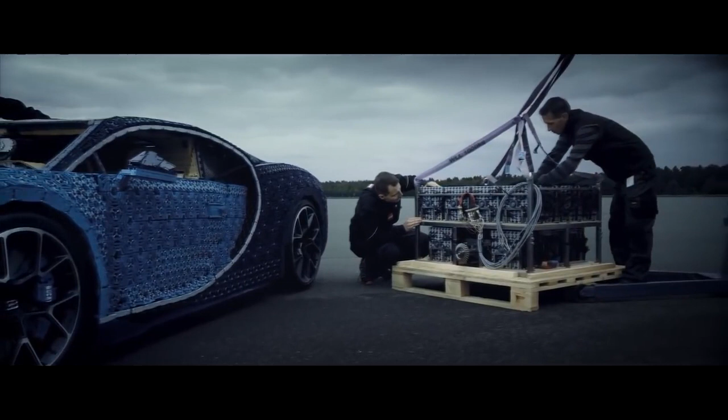Trying to match the elegant curves of the Bugatti Chiron using only LEGO Technic elements was the first challenge. Creating the engine was the second. As if constructing the car in LEGO Technic wasn't enough, we also decided we'd like to power it with small LEGO Technic power function motors as well. It sounded plausible on paper, but was it even possible? Would our car actually drive?

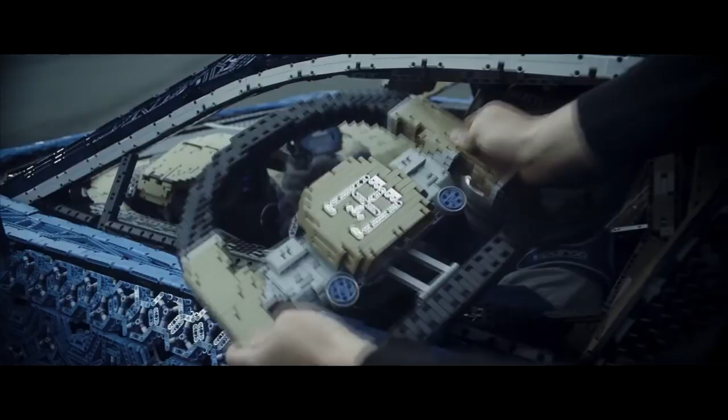Who better to find out than the guy who test drove the real Bugatti Chiron during its development? We did our last-minute checks, held our breaths, and sent him on his way.

Our amazing LEGO Technic car just kept on going. LEGO Technic. Build for real.

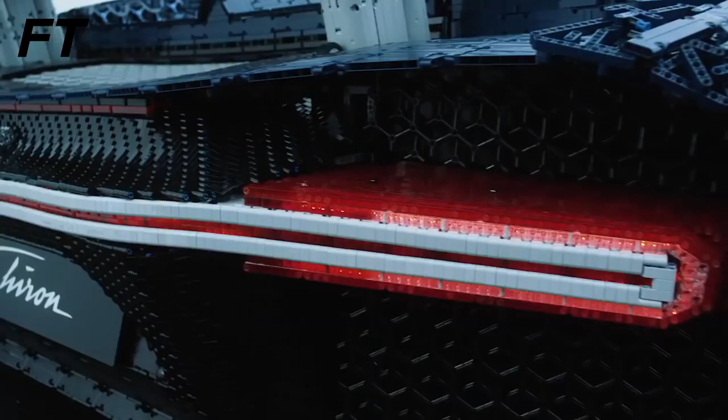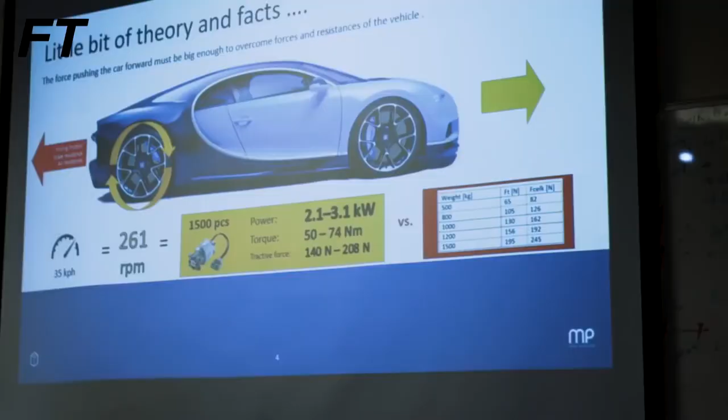In the LEGO Technic team, we came up with a really crazy idea. Could we build a full-scale Bugatti Chiron out of LEGO Technic elements and actually make it drive? This is the story of how we did it. It's one thing to get an idea. It's something else to actually make it happen.

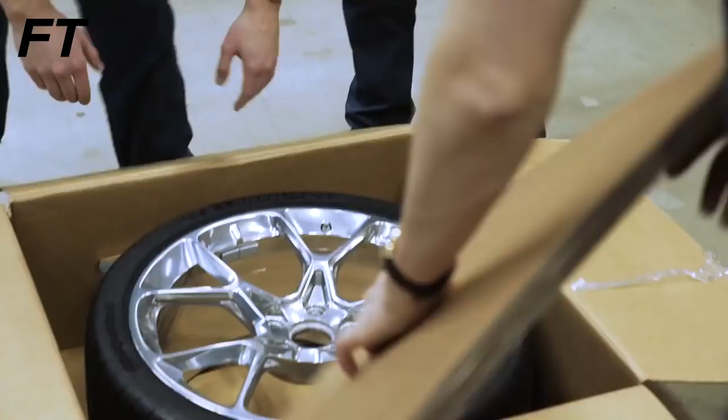But our goal was to prove that with LEGO Technic, you can really build for real. So, our first rule was that at least 90% of our car had to be built from LEGO Technic elements.

So the first time I heard about the model, I was really excited because it's something we haven't ever done before. We also had a lot of concerns because we don't do much Technic building here. So we just didn't know if that's actually possible. It's something that moves the boundaries and completely redefines the standard.

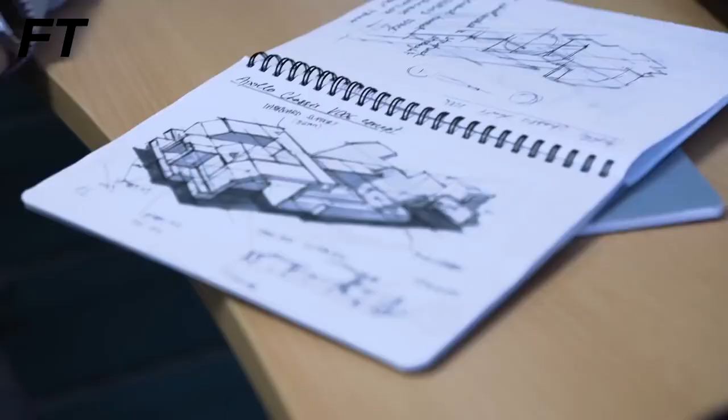Before we could even start the construction process, the team had to do a lot of research and sketching. We quickly realized that only a few technical parts could be drawn on computers. Most of the car had to be designed while we were building it.

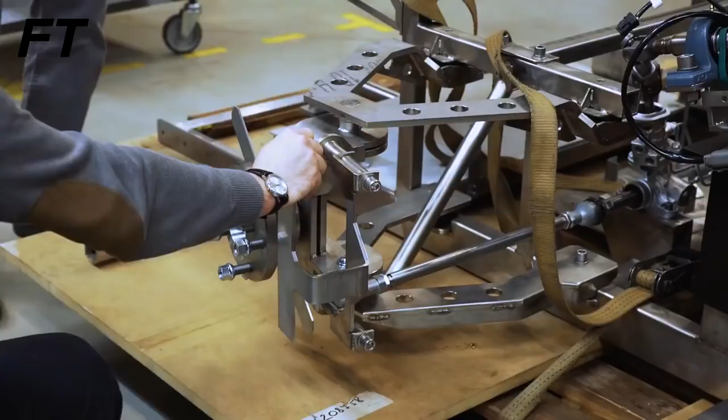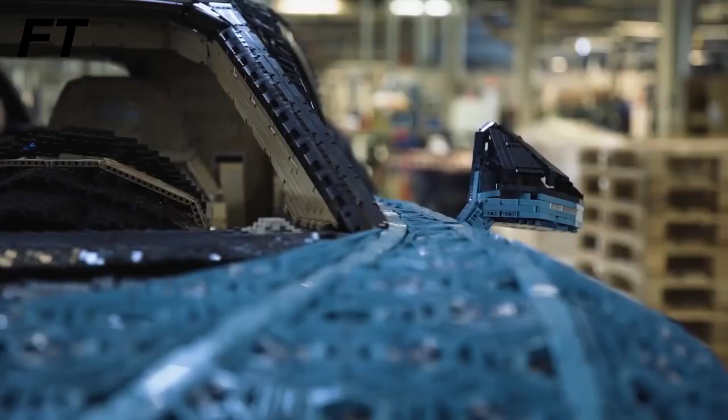We tried to minimize the construction as much as possible, so not to go with the classical chassis as all the cars have. We tried to minimize everything and to be closer to build for real. And that's the reason why, for example, now we have the A-pillar, the rear wing, or door hinges made of LEGO Technic bricks. And it was a huge task for the team to build almost everything out of Technic elements.

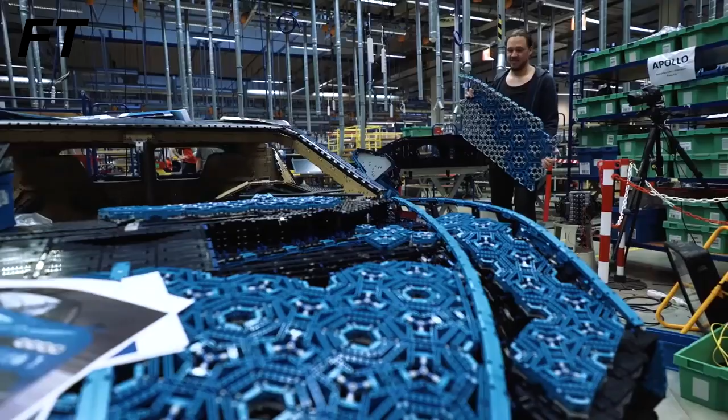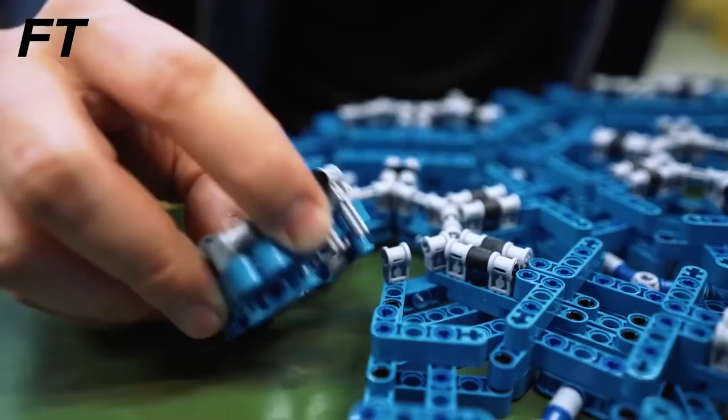The real Chiron has very sculptural aesthetics with a lot of curved surfaces. Basically, there is no straight line on the car. So we had to come up with a way to replicate the surface of the car with LEGO Technic. And for that, we came up with this so-called skin.

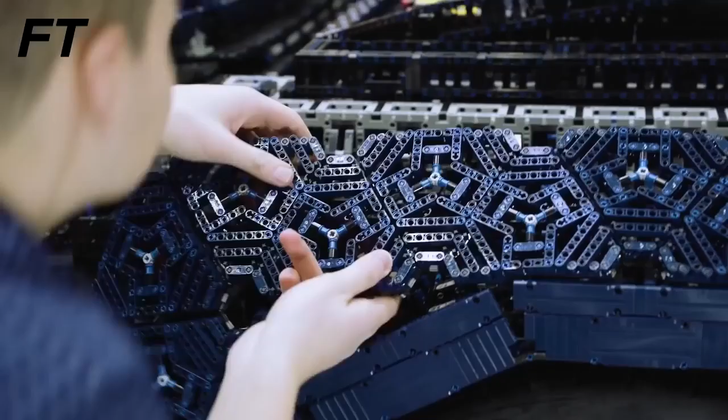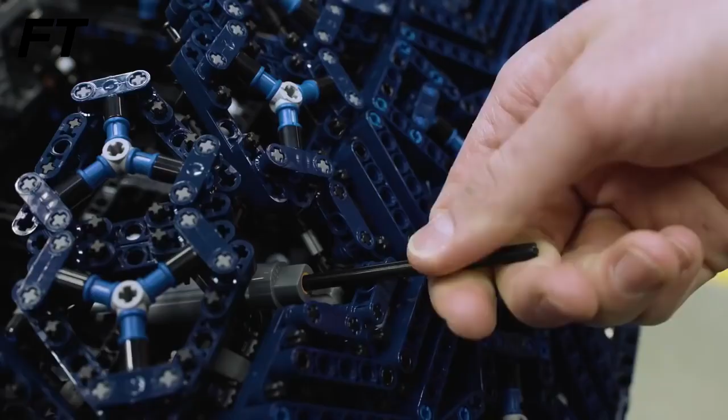Basically, the idea is we divide the surface of the car into very small triangles and then connect them with flexible elements. So we can actually have this impression of a curved surface. We not only had to build the car, but a special tool for adjusting the outer skin as well.

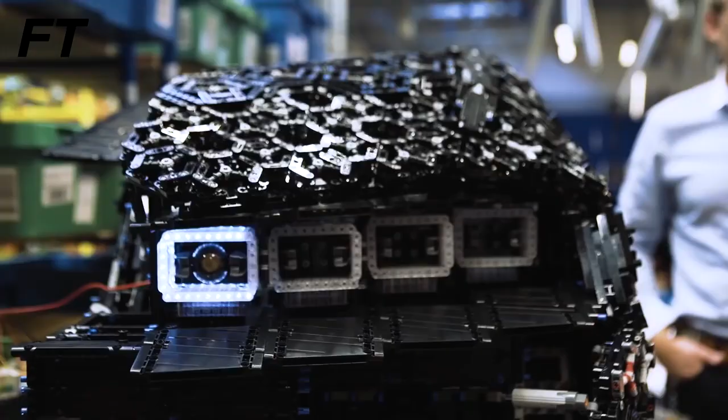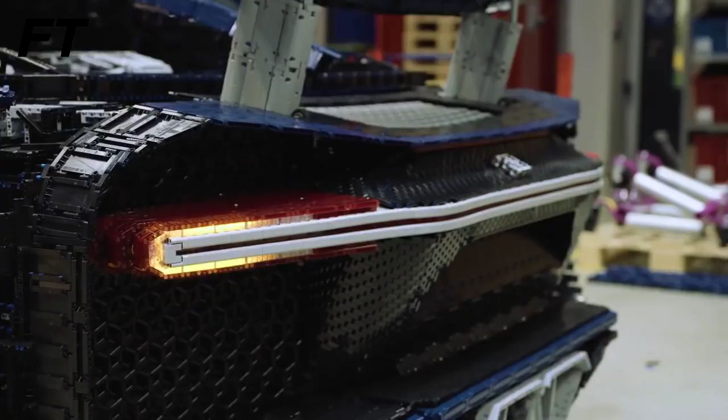One of the key design elements of the original Bugatti Chiron is the unique light system. The iconic wide rear light bar is an integral part of the Chiron's DNA. So it was very important for us to reproduce the entire light system in the LEGO Technic version and make it work just like the original car.

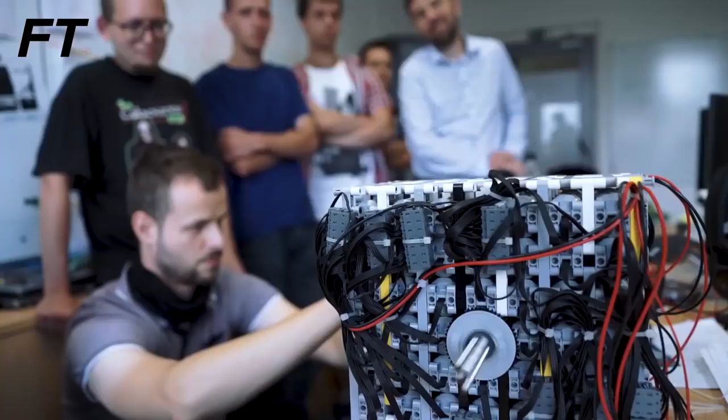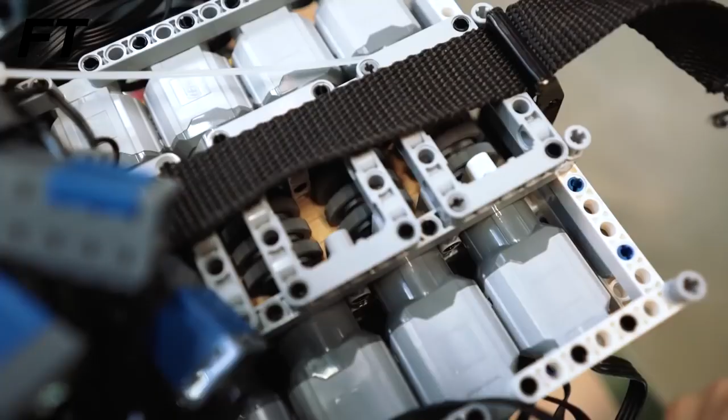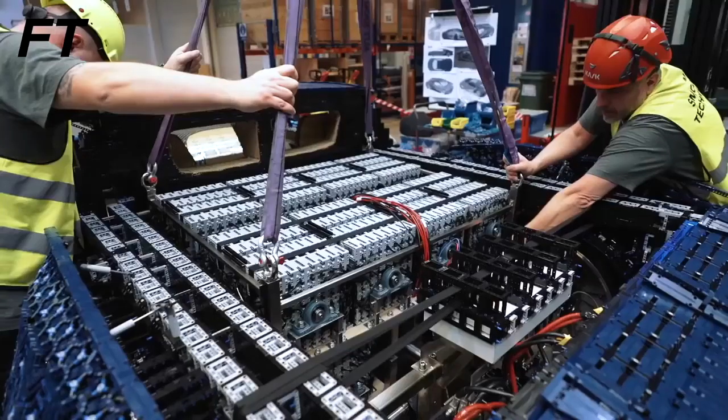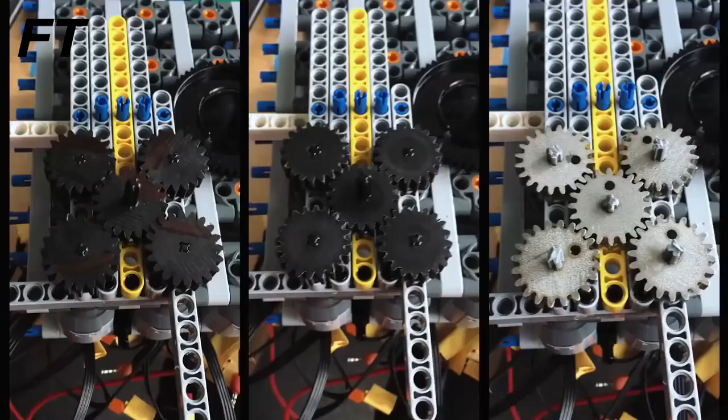The small LEGO Technic gear wheels were a major concern. They had to move a car with a weight of 1.5 tons. We started by testing other materials like metal, Kevlar and carbon fiber. Well, it was kind of interesting for me that the LEGO Technic gears were better than the Kevlar ones or the carbon fiber 3D printed gears.

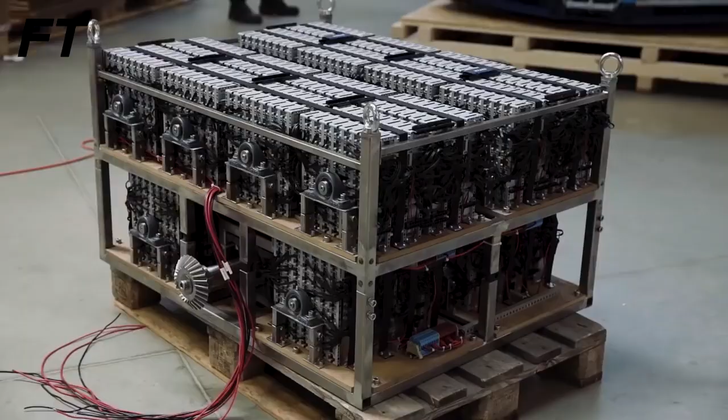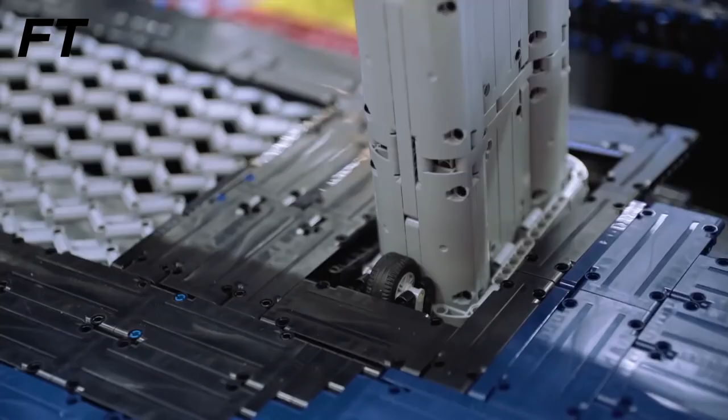A major technical challenge on this LEGO Technic version of the Bugatti Chiron was the large rear wing, especially when we decided to make it fully functional and powered by LEGO Technic Power Functions and pneumatic systems. This was a true build-for-real project, and all details had to be perfect.

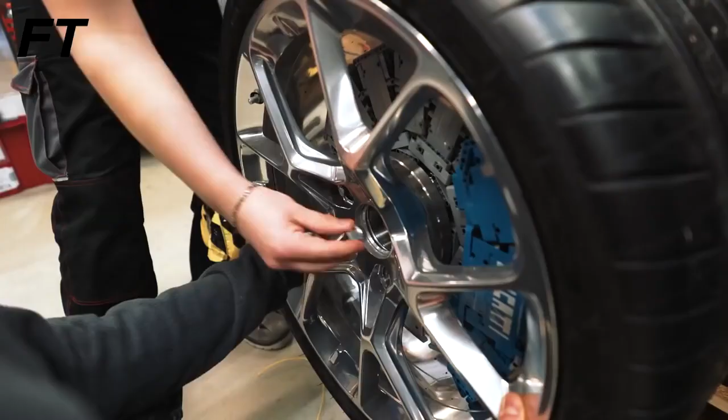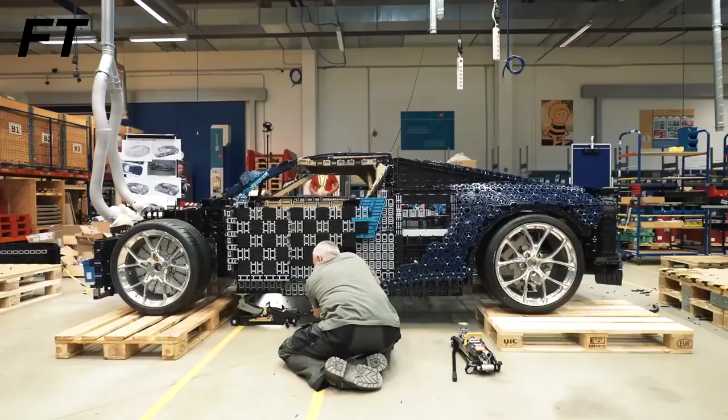Altogether, the team spent more than 13,000 man-hours constructing the car and used more than 1 million LEGO Technic elements. Every single element was assembled by hand, completely without glue. The final construction had to be both stable and flexible, so the car could drive without breaking apart. And the result was astonishing.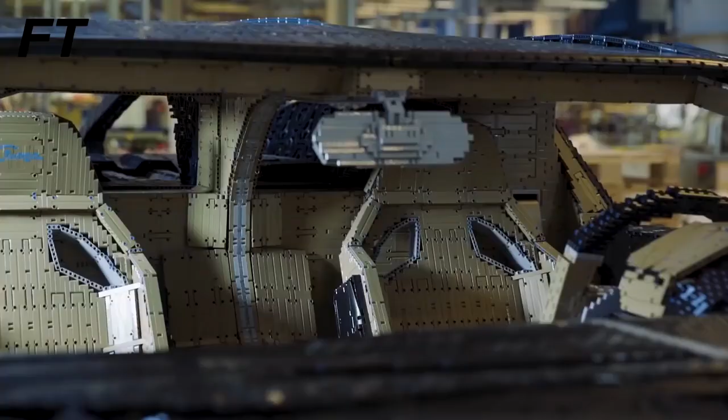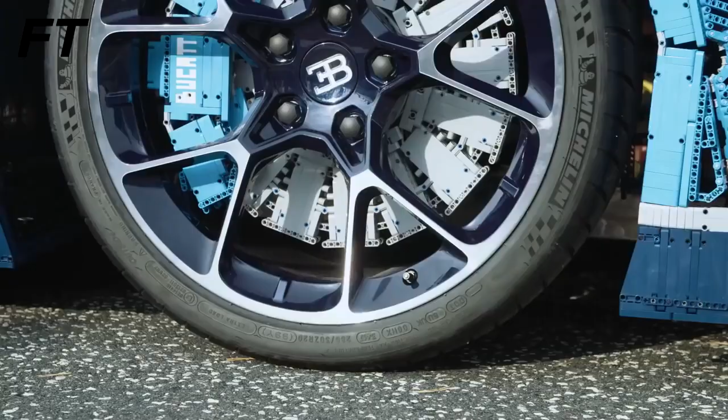It was time to leave the workshop and head to the ultimate test track at Ehra-Lessien, outside Wolfsburg in Germany, the same track where Bugatti test drive their vehicles. Was it possible to build a car out of LEGO Technic and make it drive using only LEGO Technic Power Functions motors? We were about to find out. There was only one person who could drive our car, and that was Andy Wallace, the official Bugatti pilot. He was ready, but was the car?

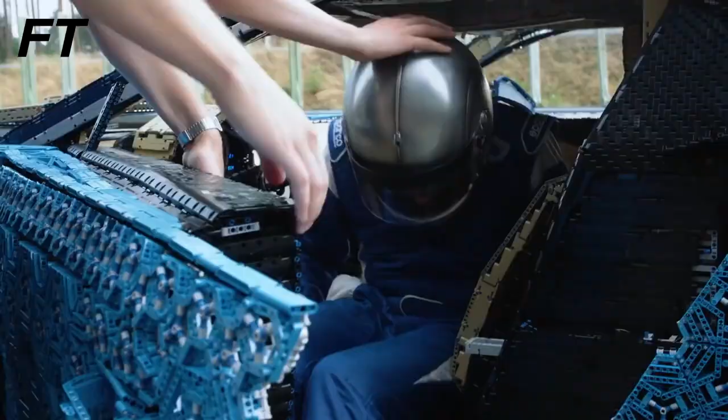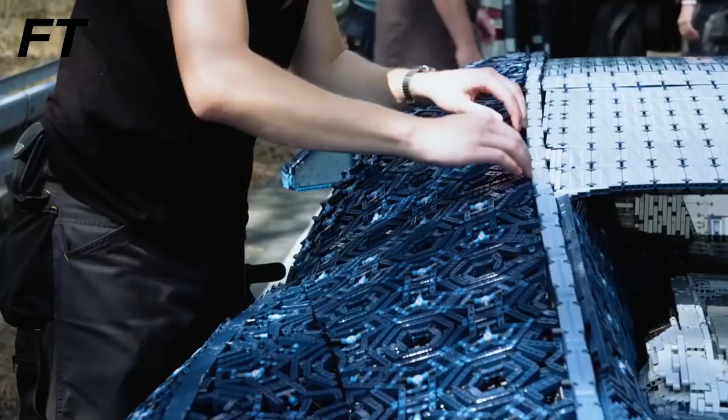It could drive, but only a few meters. Something was wrong. Was this going to be a major failure instead of the success we dreamed of? The team had to quickly identify the problem and fix it. We disassembled the hood to gain access to the motor unit. The problem lay with the heavy metal chain in the center of the engine block, not with any LEGO Technic elements or motors.

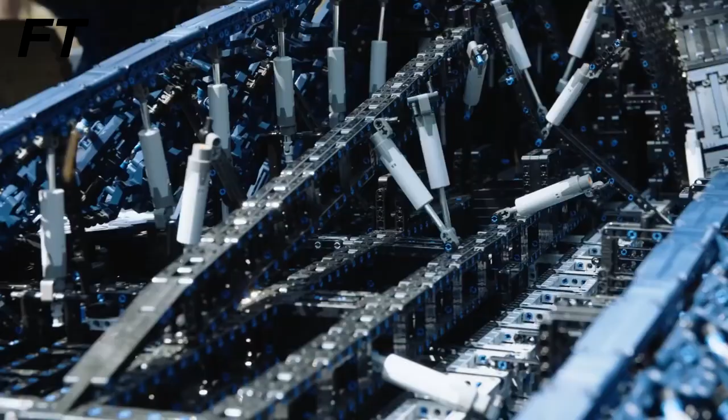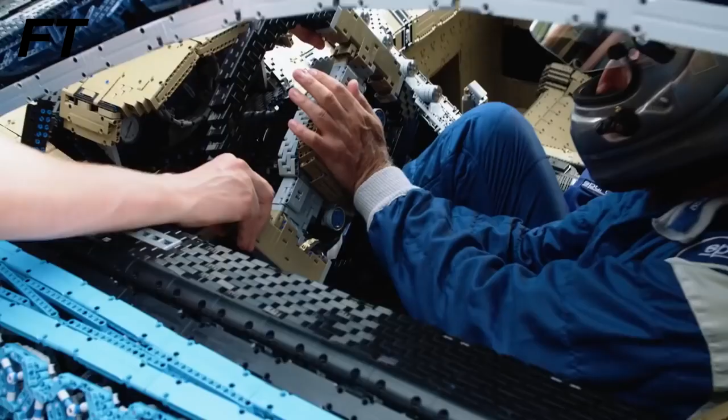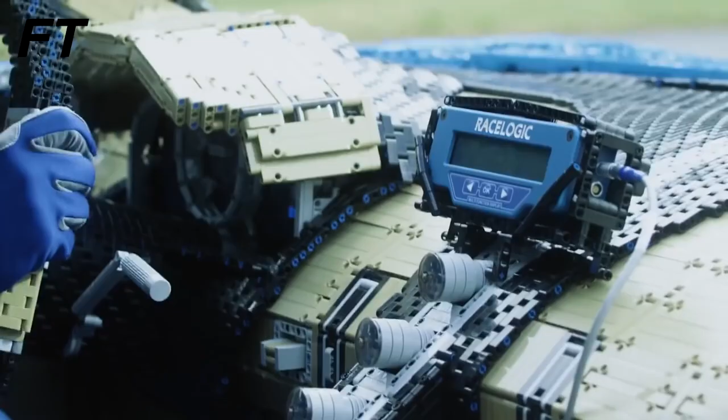The update is that we have opened the car and saw the engine, and we adjusted the chain, and we made some adjustments also regarding the position of the shafts. So right now it's more flexed, so it should work. Everyone was ready, and so was the car. It could really drive. It was an incredible moment. The car drove faster and faster and continued down the track.

That was fantastic. Yeah. It really was, yeah. And it actually was gaining a lot more speed as we went along. Yeah, after all the toil, it's amazing. I mean, what else? This is why we came, and it's great. It's running under its own power.

Every little piece that's on the real Chiron is there. And it's not until you sit and you look and you spend time taking it all in and enjoying the surroundings. But also, you know, okay, we know dynamically it runs very well. But if you stand 10 meters back between the LEGO Chiron and the real Chiron, you really would struggle to tell the difference. I mean, seriously, it's that good. We did the impossible. We built a car out of LEGO Technic elements and actually made it drive.